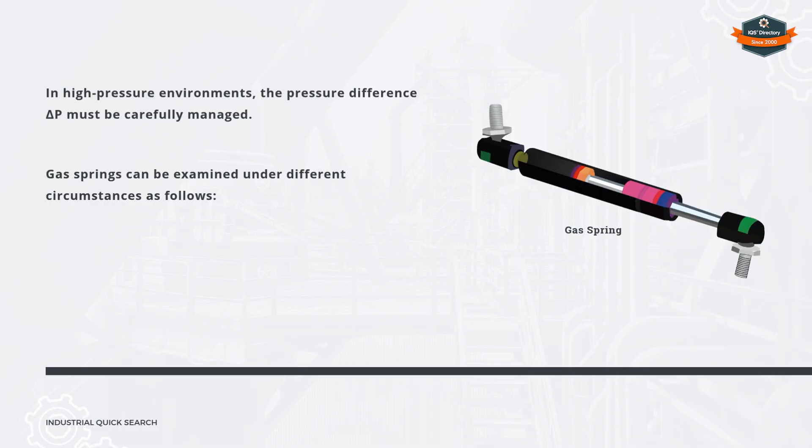Gas springs can be examined under different circumstances as follows. Terminology related to gas spring operation. Stroke of a gas spring.

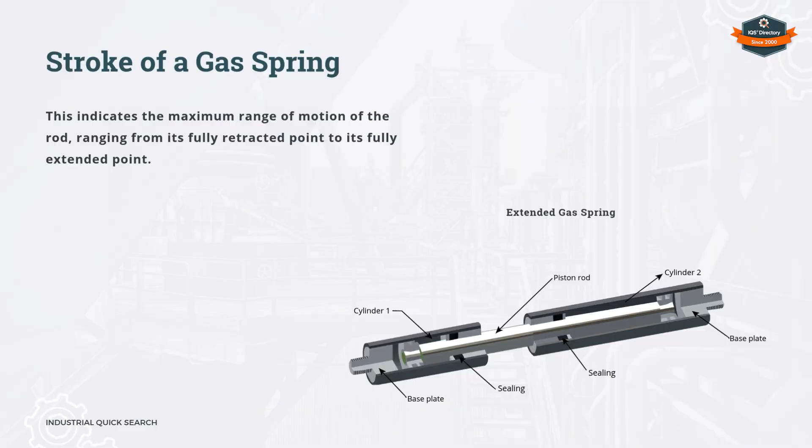Extended or expanded length. Closed or compression length. Beadroll section.

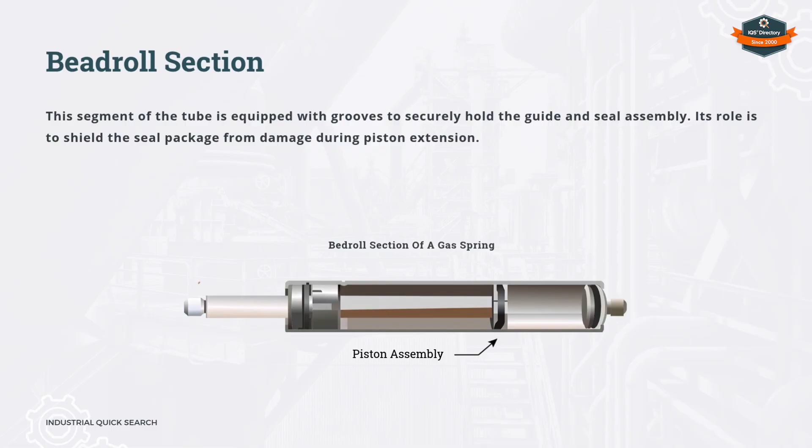Differentiating air shocks, gas lifts, gas struts, and nitrogen gas springs.

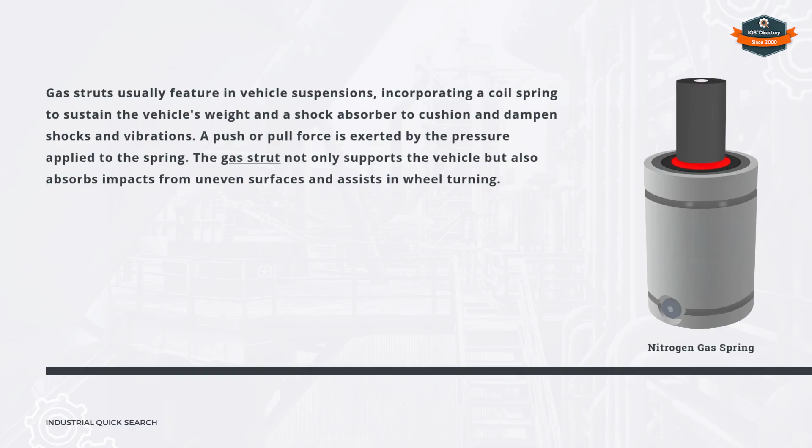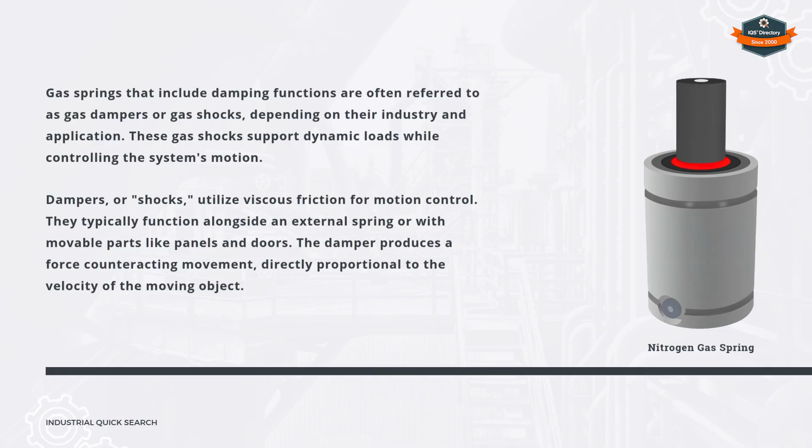Comparing coil springs and gas springs.

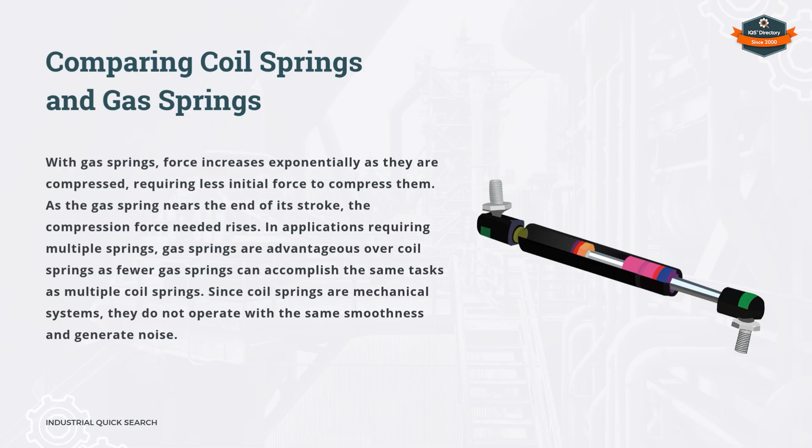Chapter 2: How does a gas spring work?

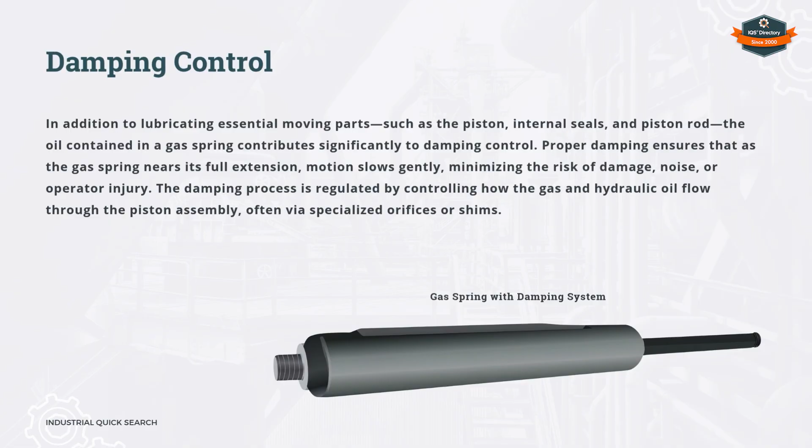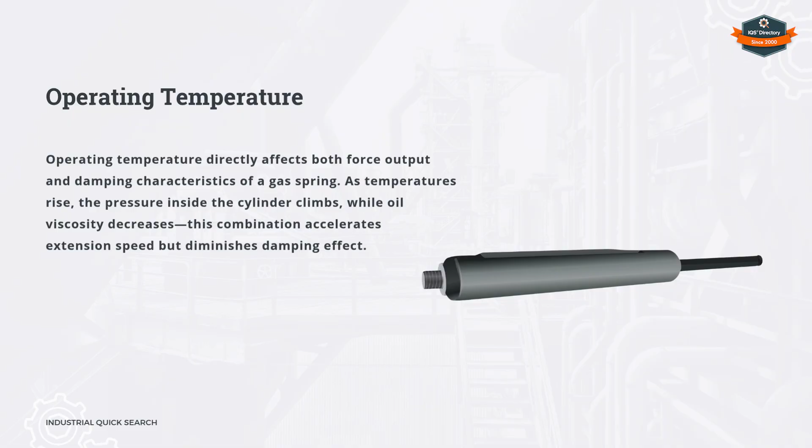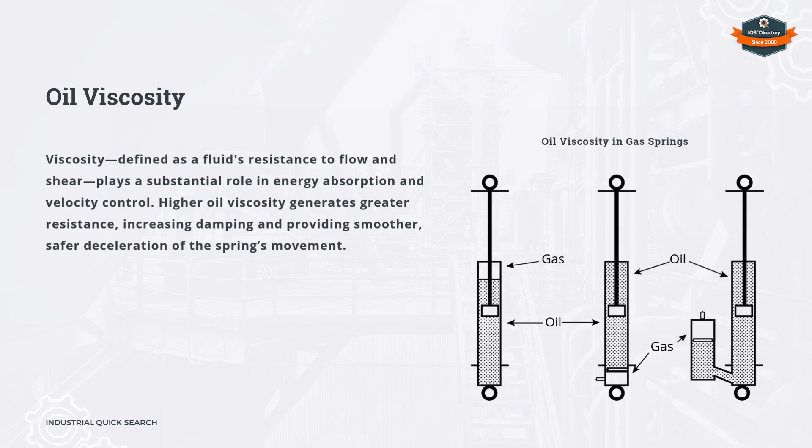Key factors influencing damping characteristics include operating temperature, oil viscosity, oil volume, pour point of oil, and metering and extension speeds.

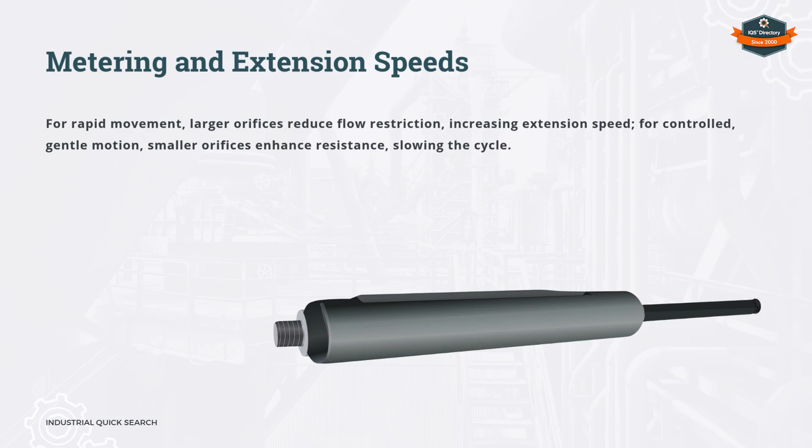Gas spring safety, precautions, and best practices.

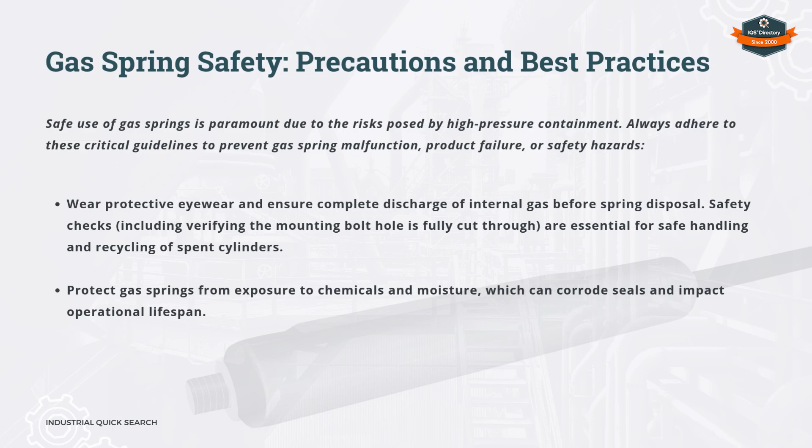Common gas spring installation issues and troubleshooting.

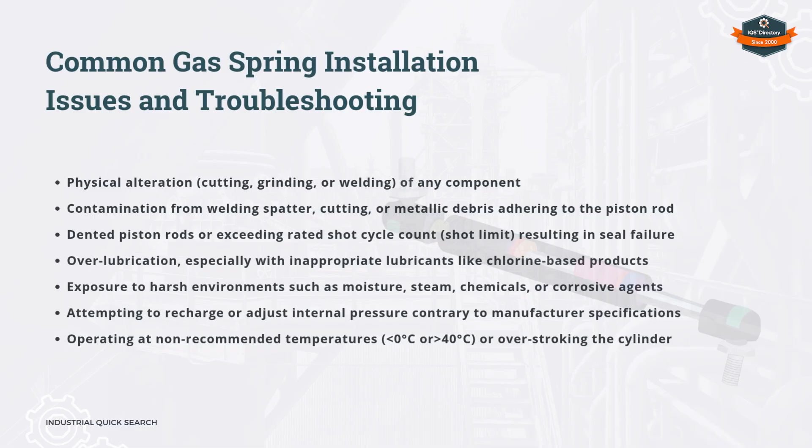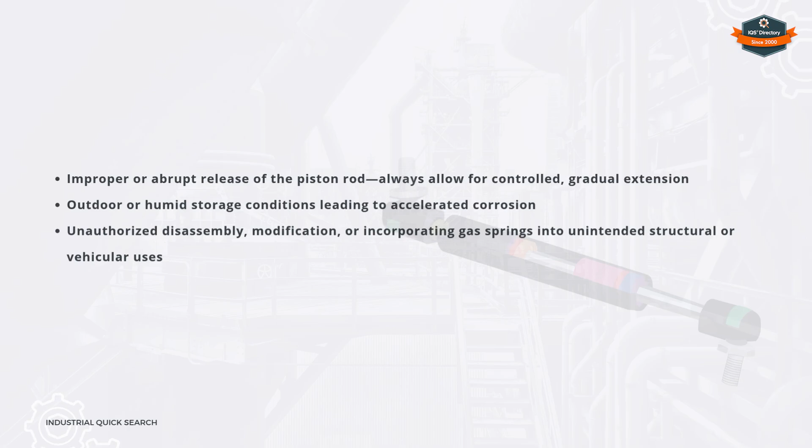Chapter 3: What are the key considerations in gas spring design?

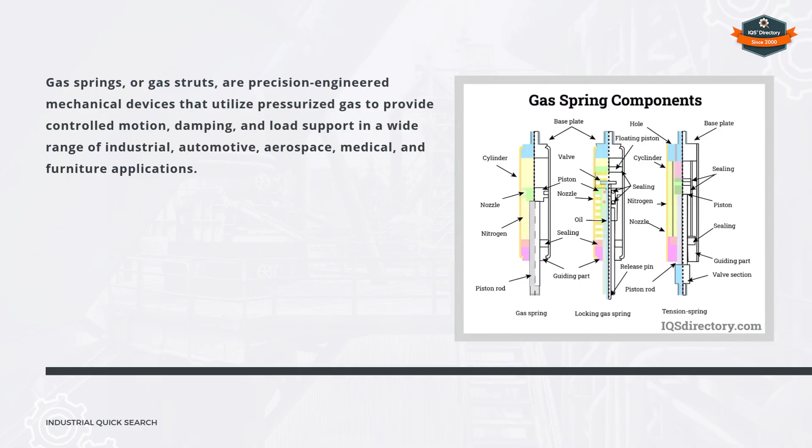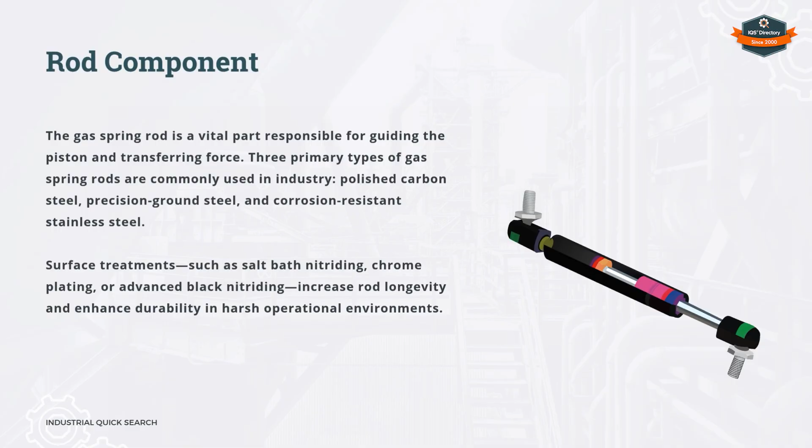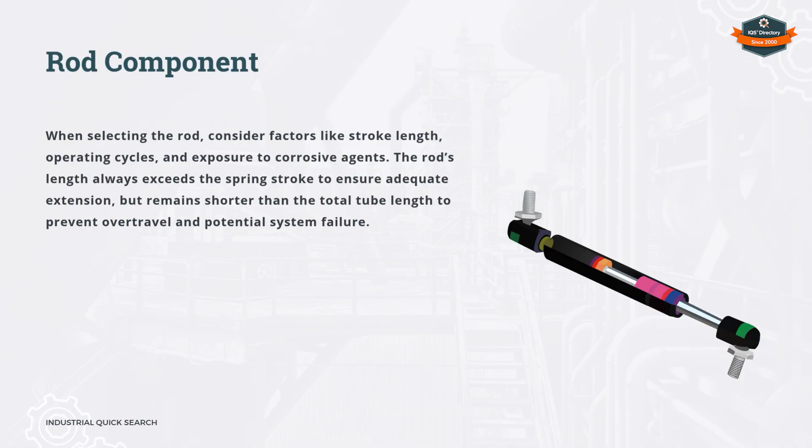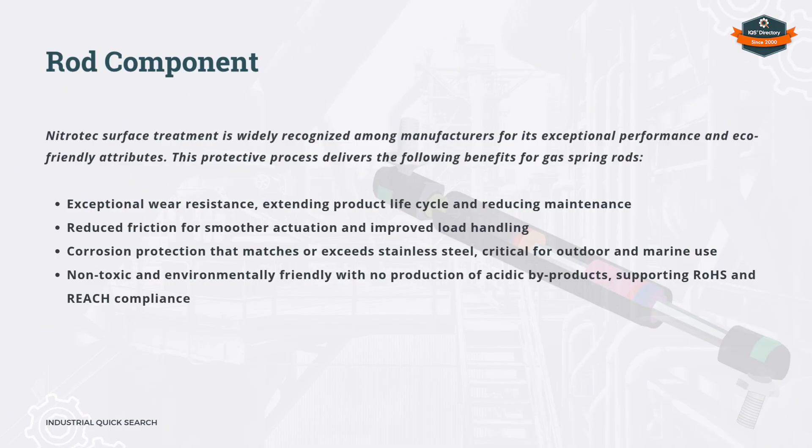Rod component. Gas spring tube.

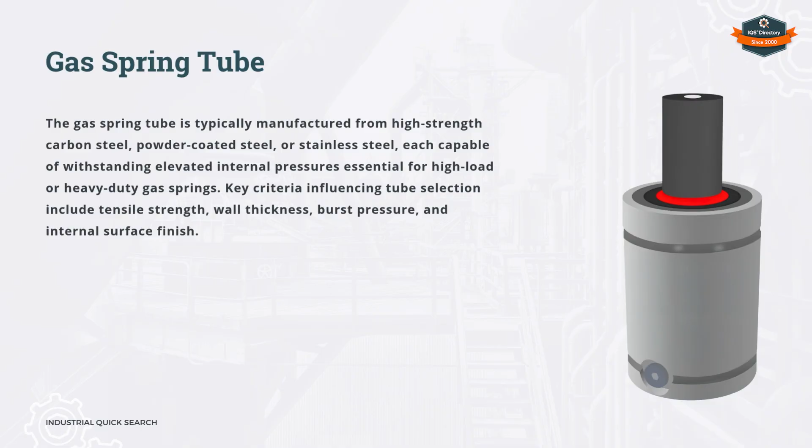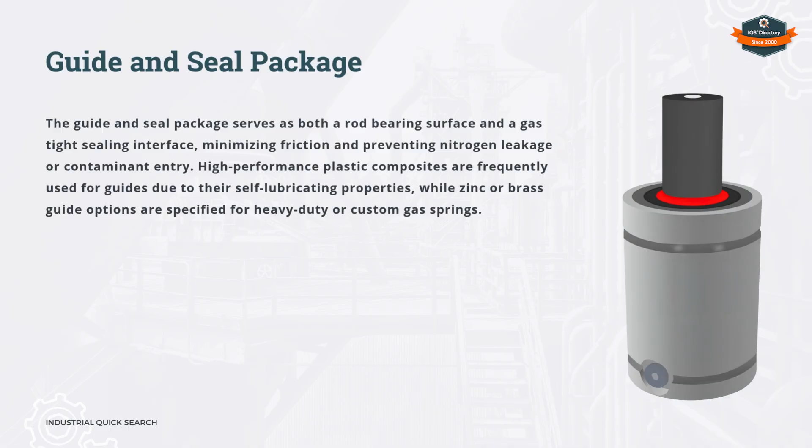Guide and seal package. Piston assembly.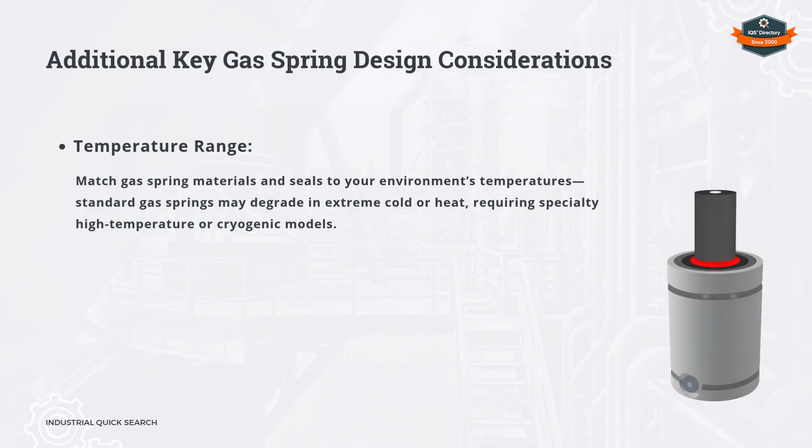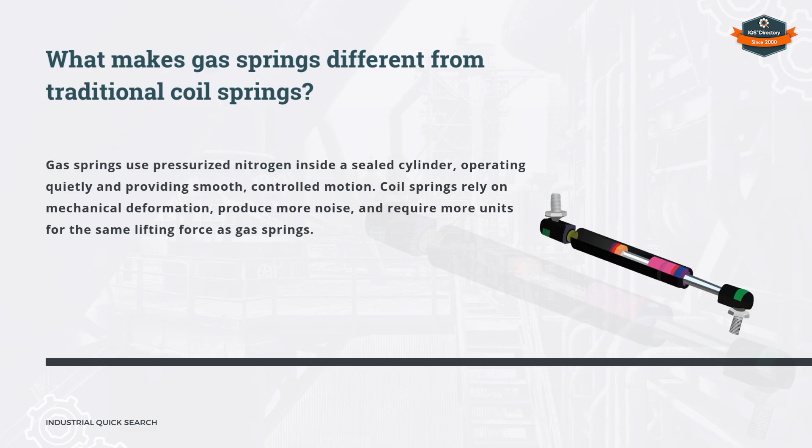Frequently asked questions. What makes gas springs different from traditional coil springs? How does operating temperature impact gas spring performance? What materials and treatments enhance gas spring durability?

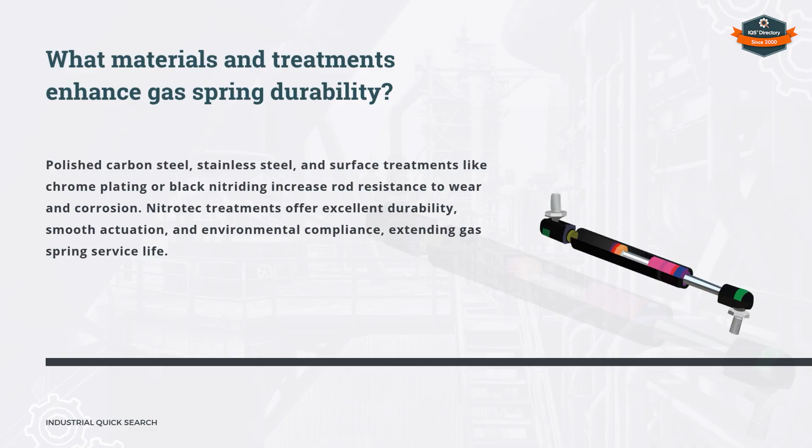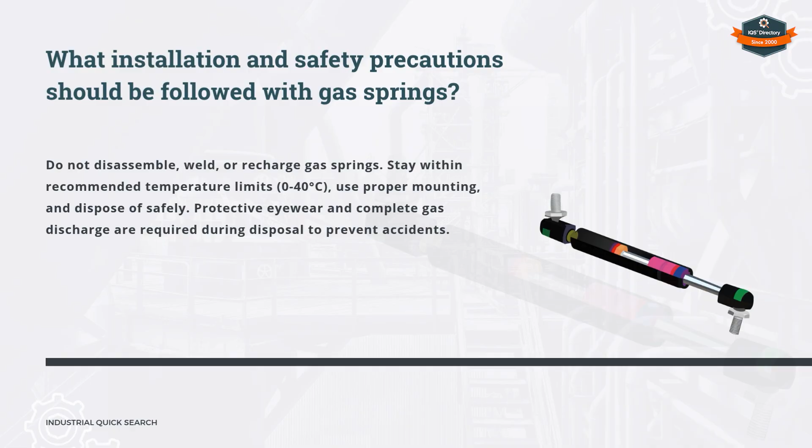What installation and safety precautions should be followed with gas springs? Which applications benefit most from gas springs? What factors should be considered for outdoor or marine gas spring use?

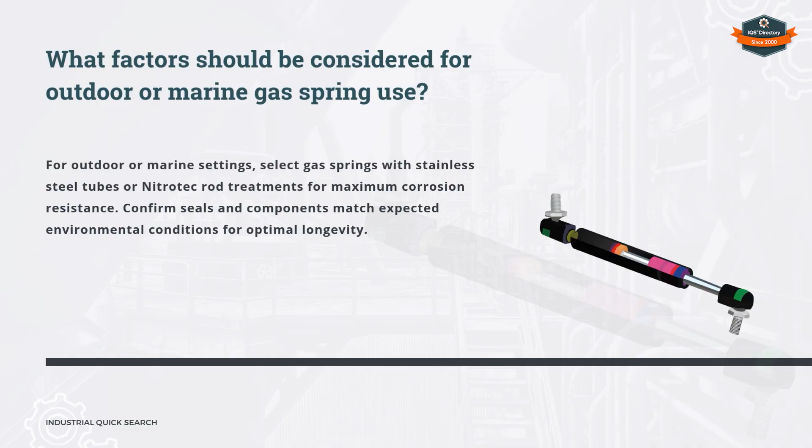Chapter 4: What are the different types of gas springs? Standard gas springs.

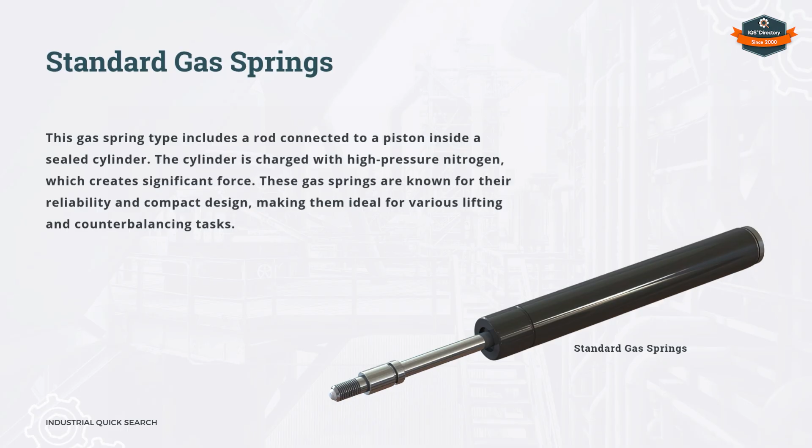Adjustable locking gas springs. Custom gas spring.

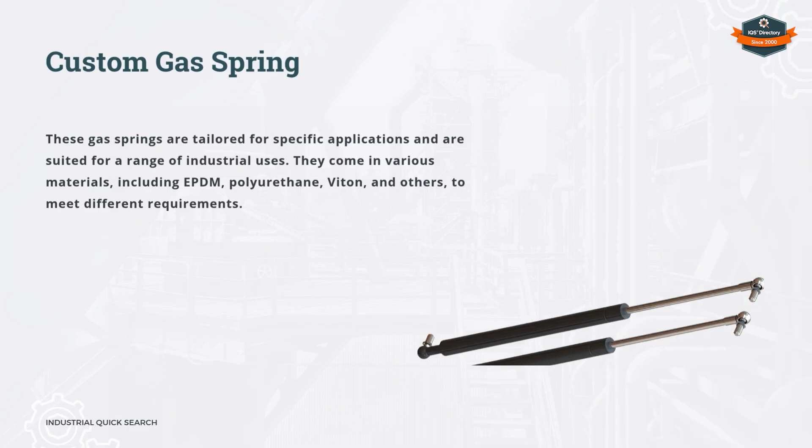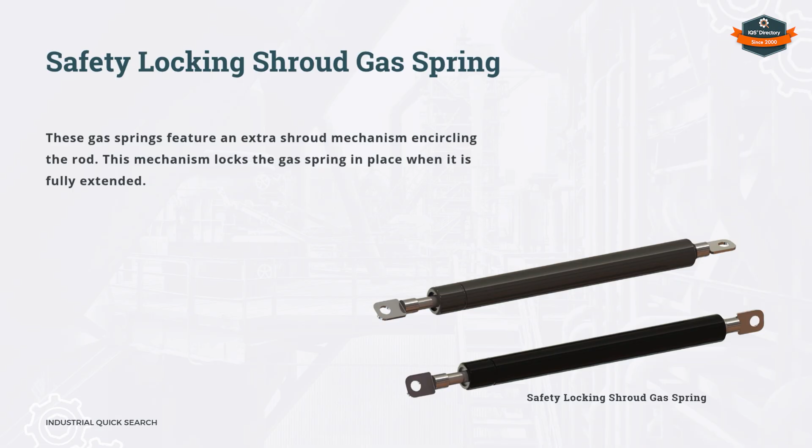Safety locking shroud gas spring. Tension and traction gas springs.

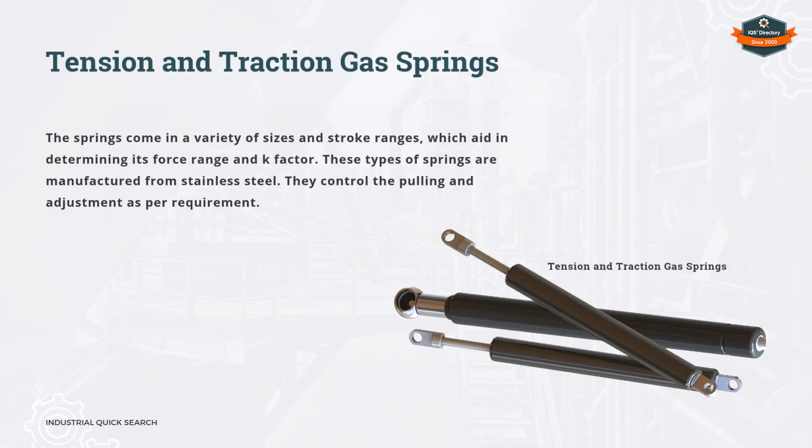Stainless steel gas springs. Gas spring dampers.

Chapter 5: What are the benefits and applications of gas springs? Benefits of gas springs.

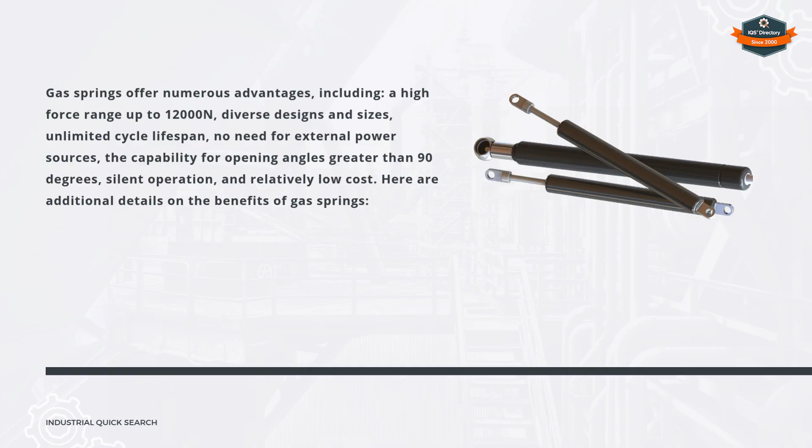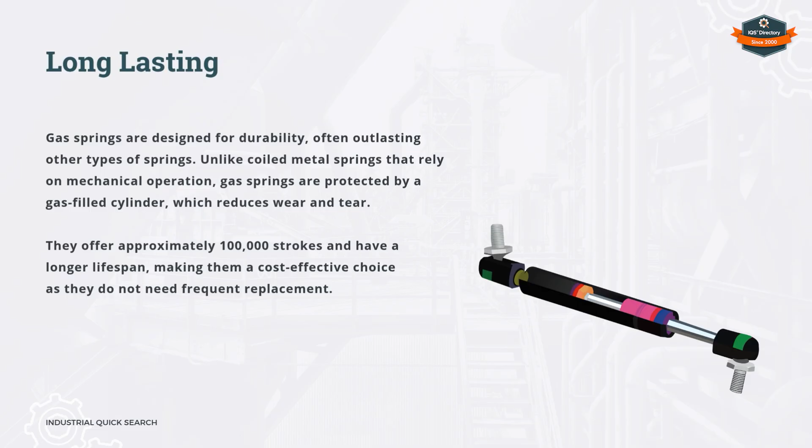Low maintenance. Long lasting. The locking option.

Ergonomics of a gas spring. Wider range of mounting options.

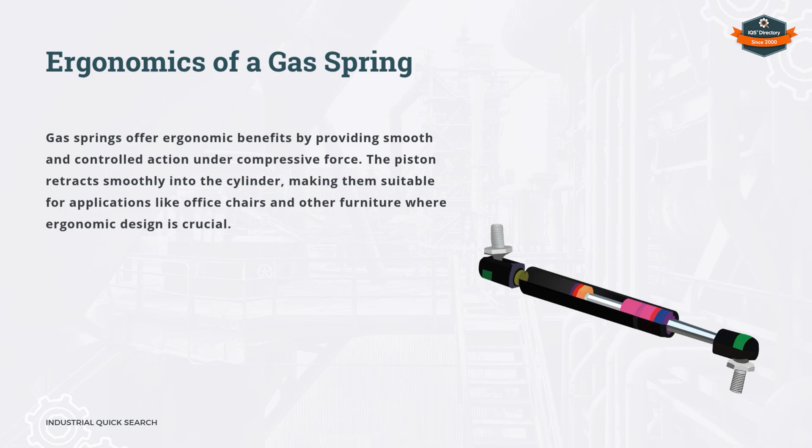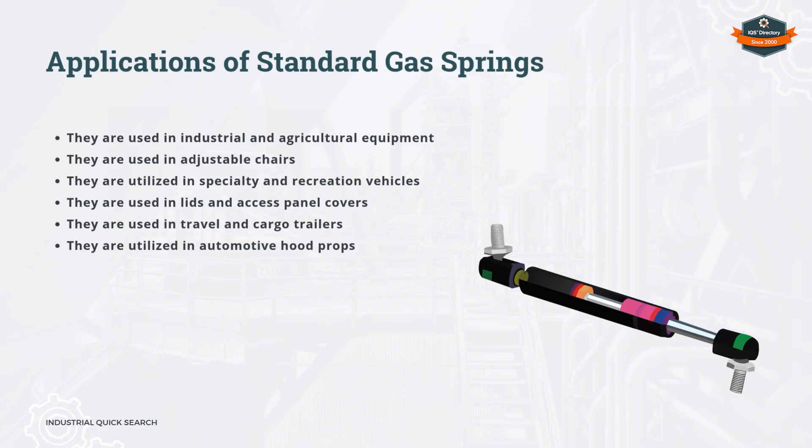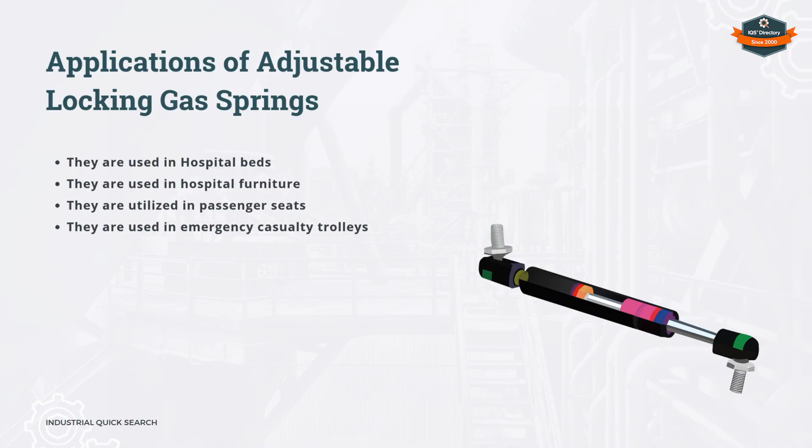Applications of gas springs. Gas springs are used in various applications, including applications of standard gas springs, applications of adjustable locking gas springs, applications of custom gas springs.

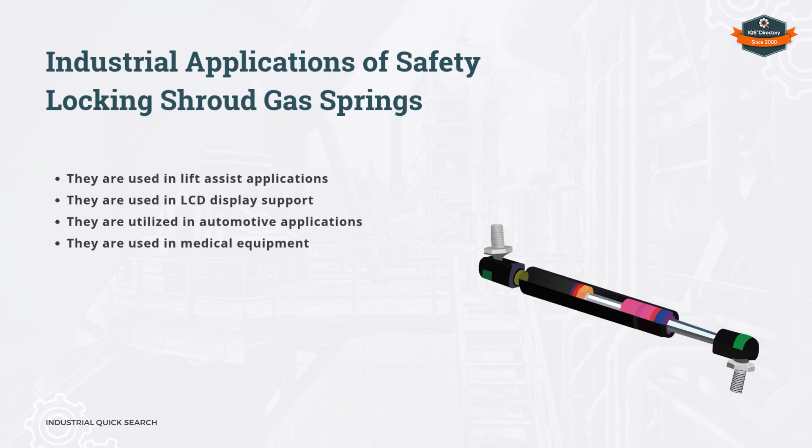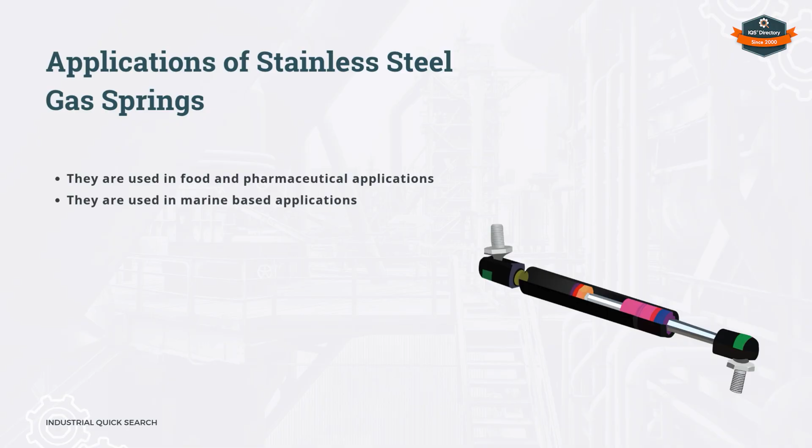Industrial applications of safety locking shroud gas springs, applications of tension and traction gas springs, applications of stainless steel gas springs, and applications of gas spring dampers.

Chapter 6: What considerations should be taken into account when installing gas springs? Considerations when choosing a gas spring. When selecting a gas spring, the following factors should be considered: performance specifications.

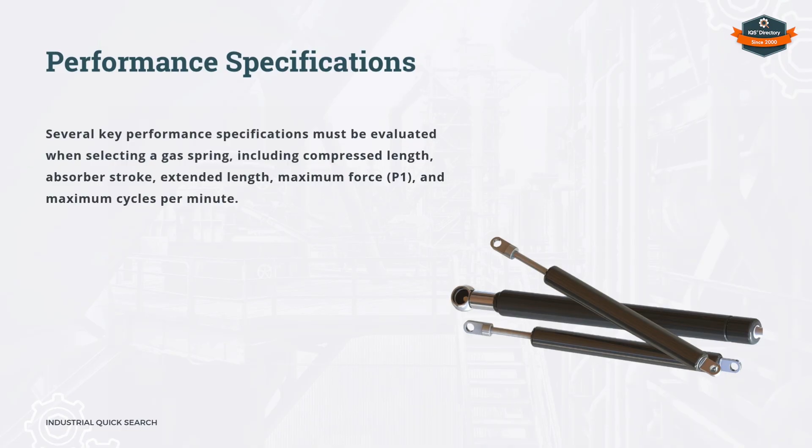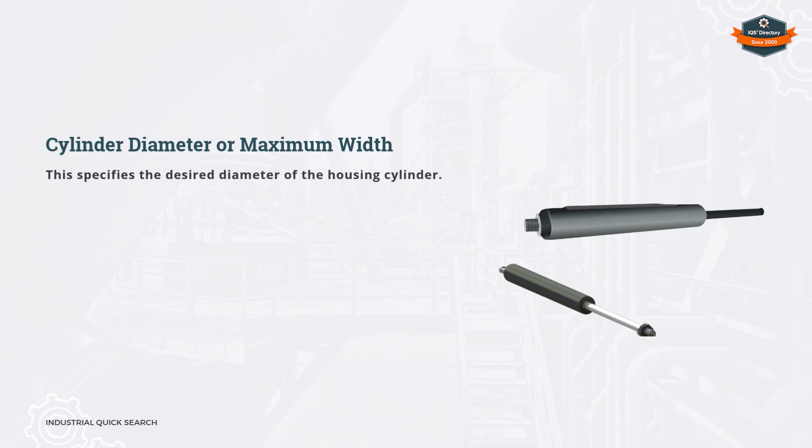Physical specifications. When selecting a gas spring, it is important to consider the following physical specifications: cylinder diameter or maximum width, and rod diameter.

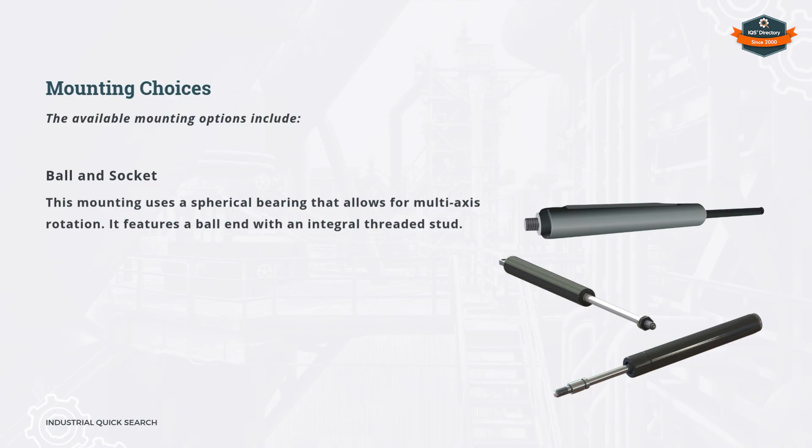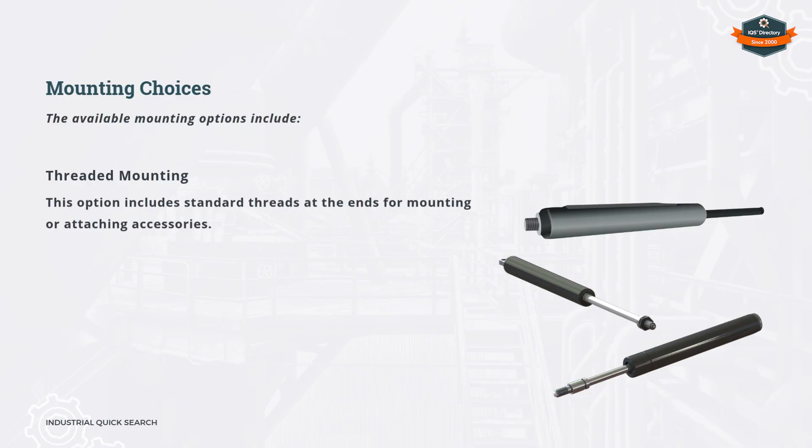Mounting choices. The available mounting options include ball and socket, clevis pins, tapered end, threaded mounting, and bumper or rod end unattached.

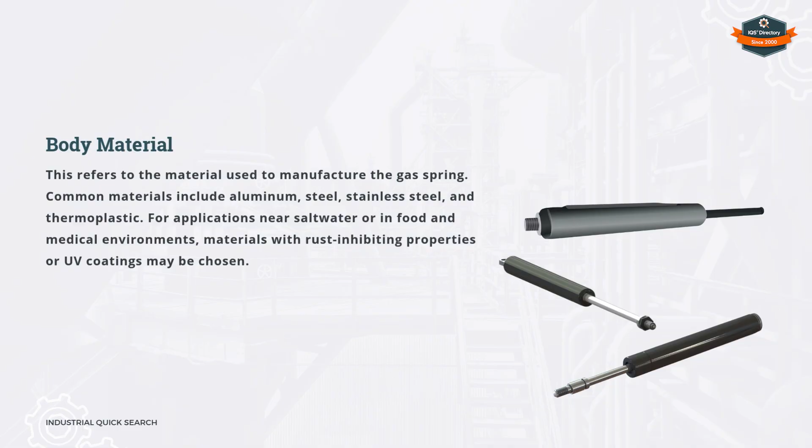Body material, size and weight of the load, spring orientation.

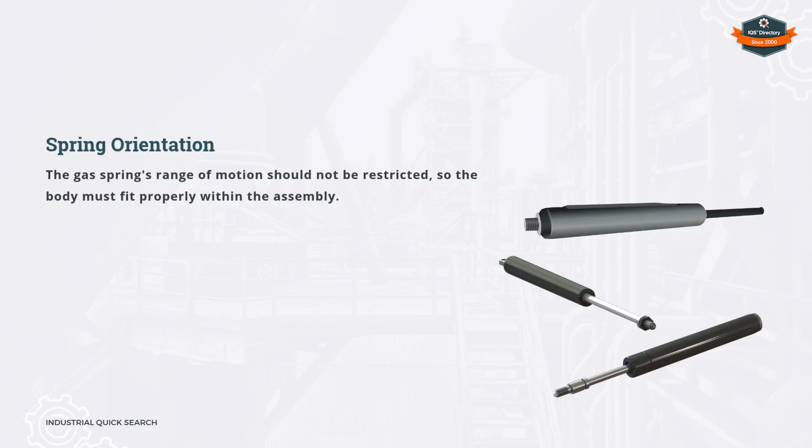Ambient temperature, center of gravity, and installation of a gas spring.